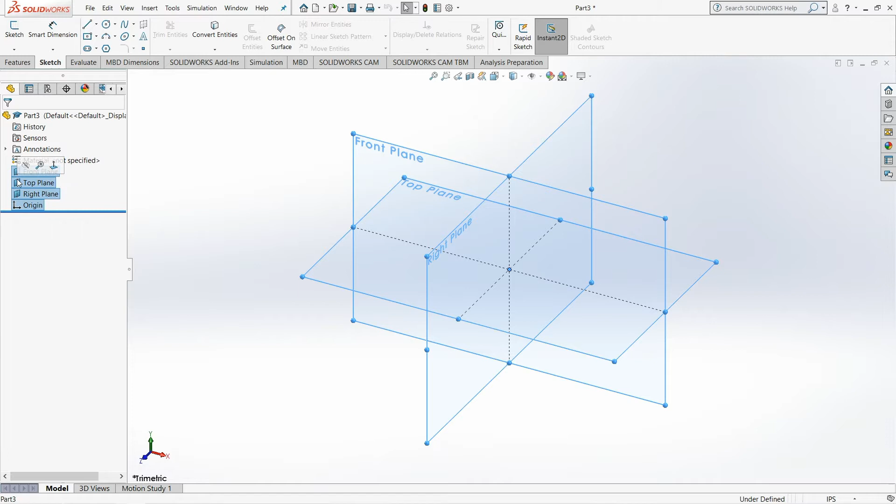Today I'll make a car wheel. First, I'll select the top plane. At first, I will make its middle part where the screws will be connected with the car.

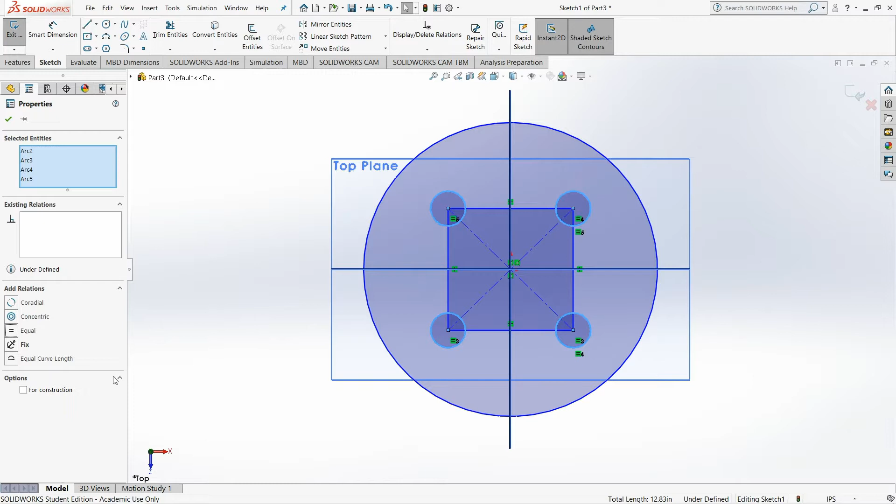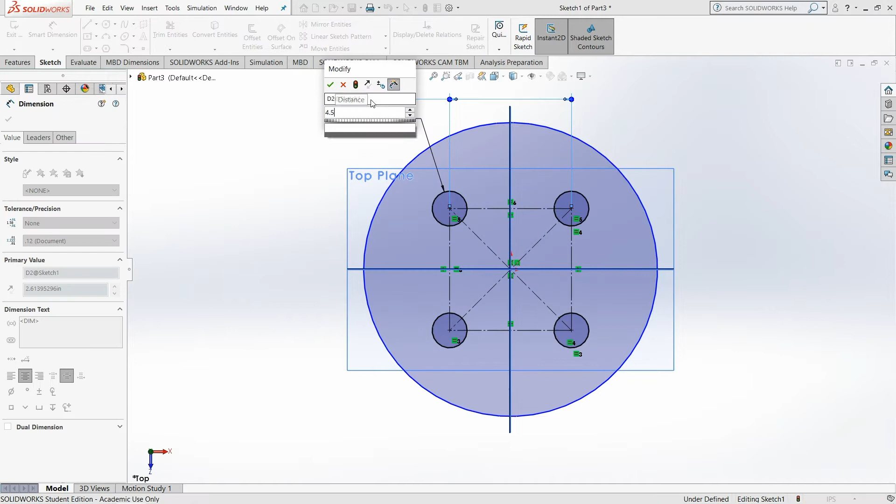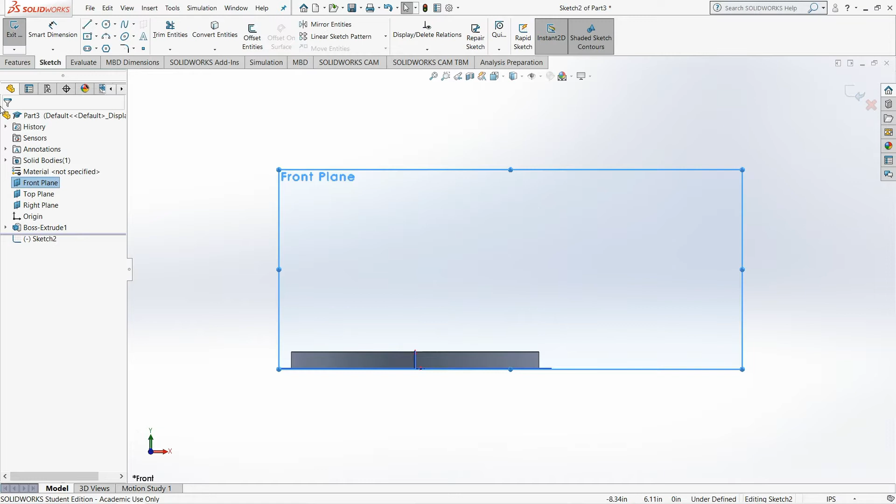I am taking dimensions arbitrarily, and it is not similar to a real car wheel. My goal is to show you how to make a wheel, not a proper wheel or like real BMW wheels, no. I just want to show you guys how to make a wheel in a very simple way. So you can make it, and when you have your own dimension values, you can make it this way or another way. It's up to you. This is my way of doing things very simply.

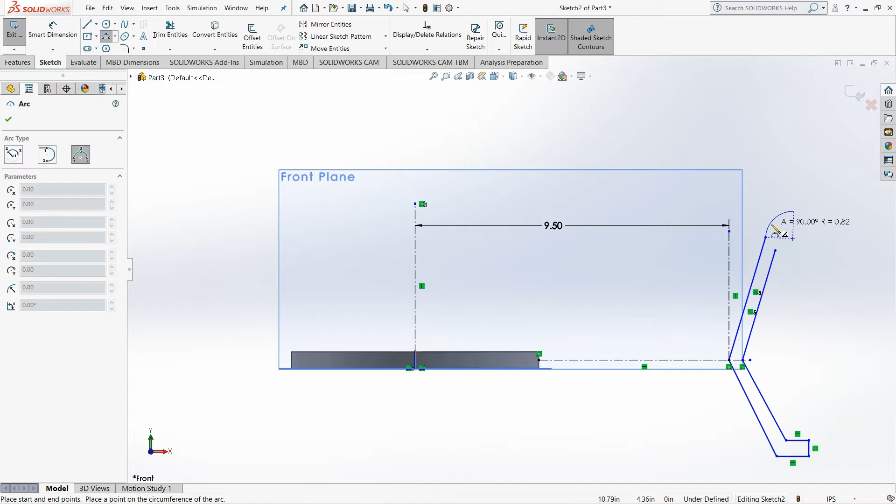Now I am making the skeleton. I will try to use revolve base, so I make a center line and make one part, and then I will make the revolve base.

Again, I'm telling you I will take my own values, it's up to me. These values will not be similar to a real car, and this design is also not a real car design. I'm just making what I want, this is my design.

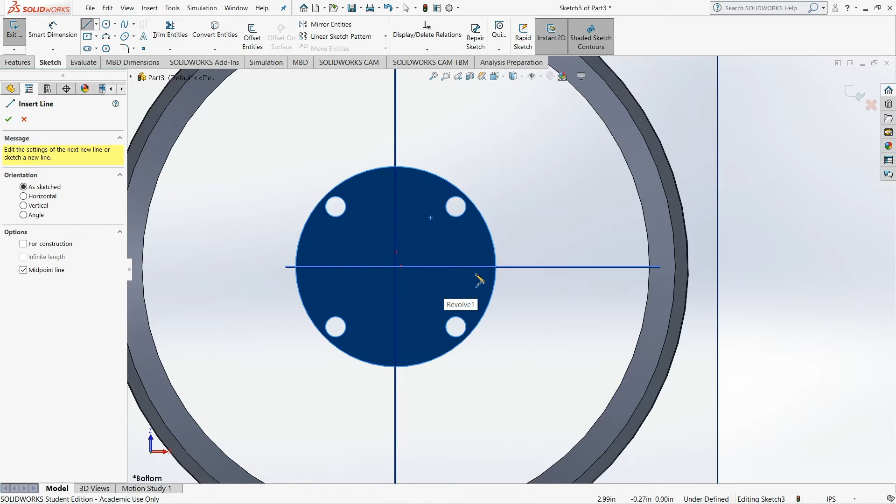Now see what I am doing. I will use loft. So at first I need to have two areas. I am making them now, see how I do it.

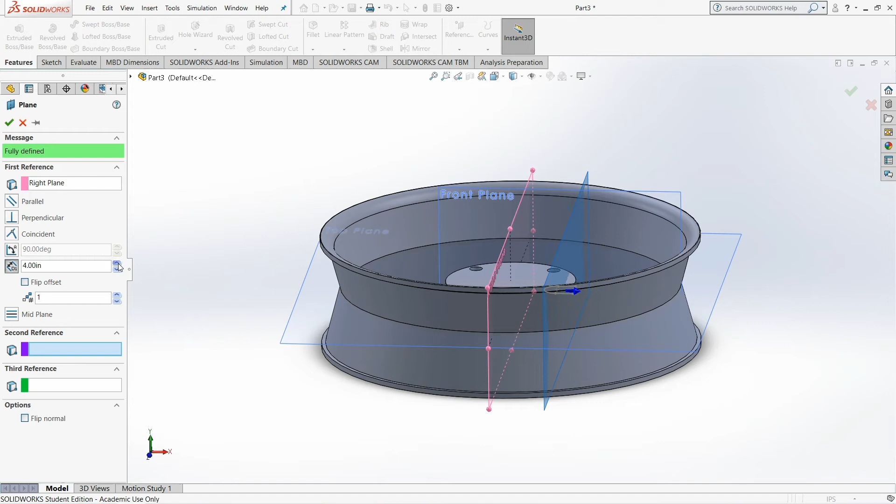I need this plane in the cross section of the body for my loft, then I don't need to extrude cut. You also can make this plane outside and loft it, then extrude cut it. It depends how you want to do it.

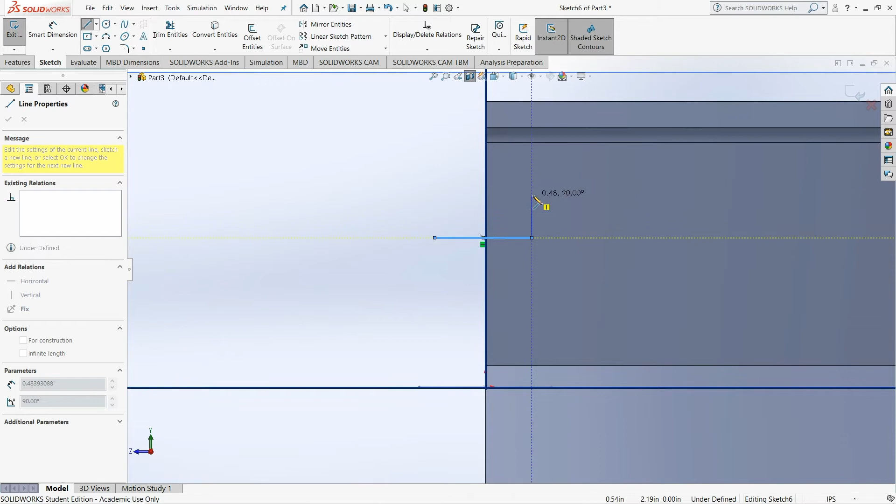So I will make the cross section to see if it's in the middle or not. And again I will say this, these are my values, don't compare them with real cars. If you want, you can make your own with a real model.

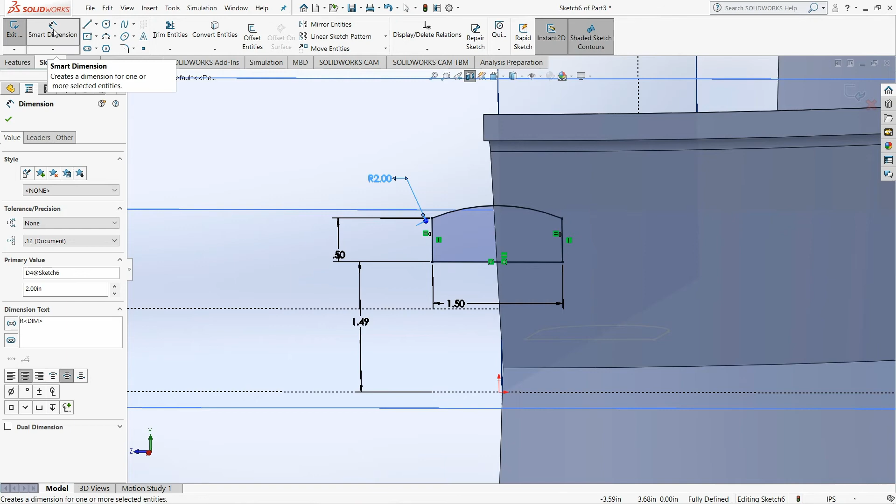So for the loft we need a guided path. Let's see now how to make the guided path.

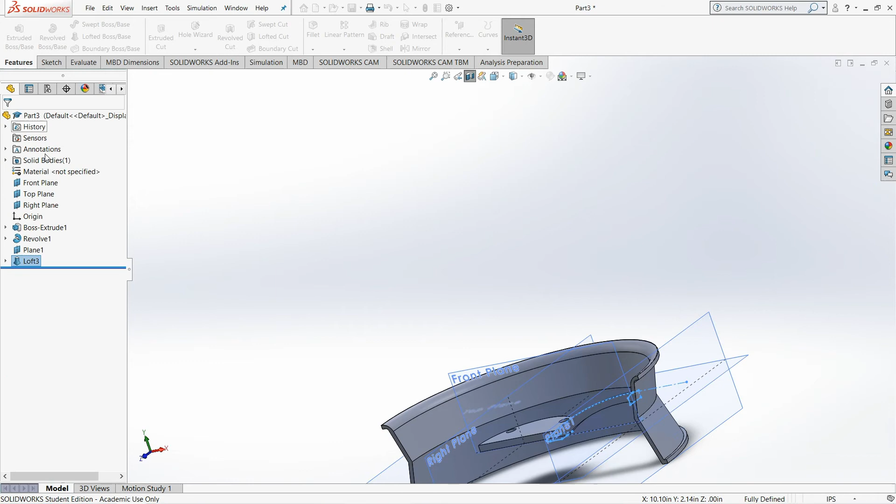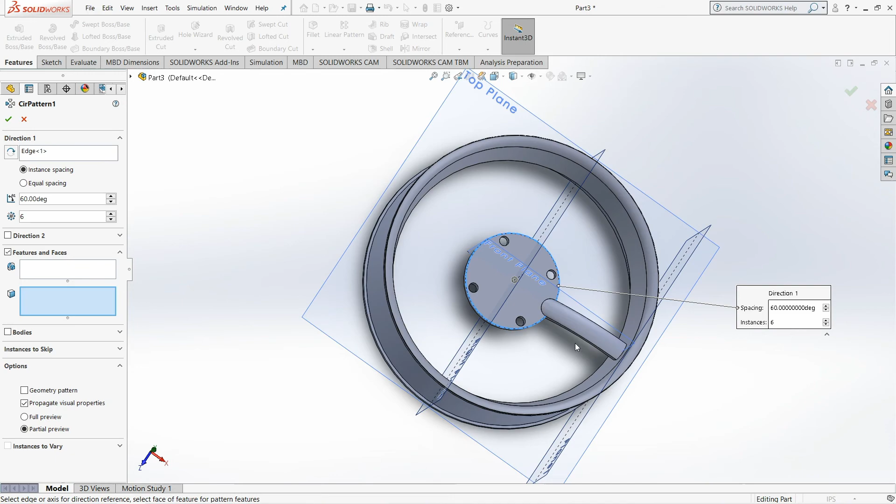See, my lofted part is done. Now I will do the circular pattern. I want to make 60 degrees and 5 or 6 copies. Let's see, is it possible or will it intersect? If it intersects, I will do an extrude cut from the hole, because it is joined in the middle part base, so don't worry at all.

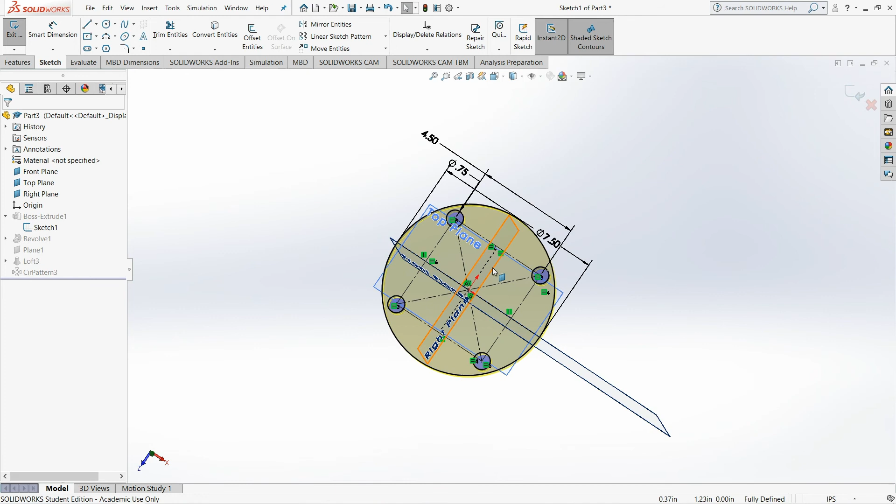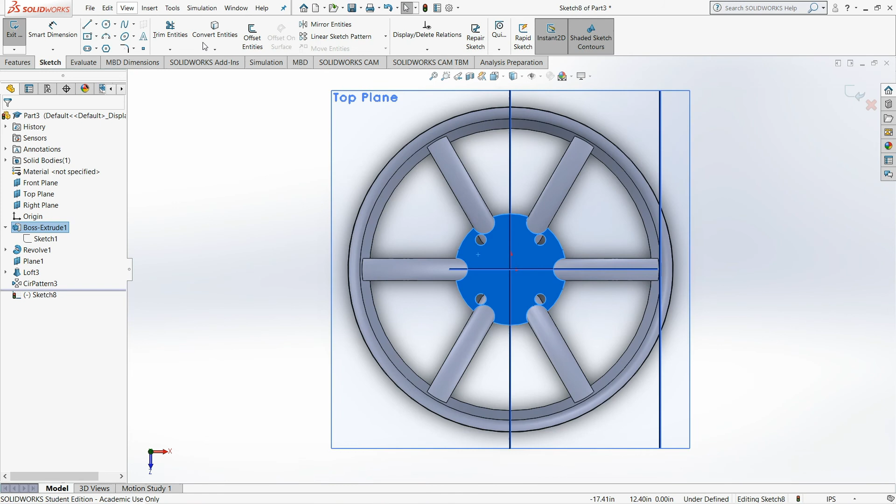For looking things beautiful, I change some values here. I will do a little bit of extrude cut now for making it more beautiful. Yes, now I need the middle hole.

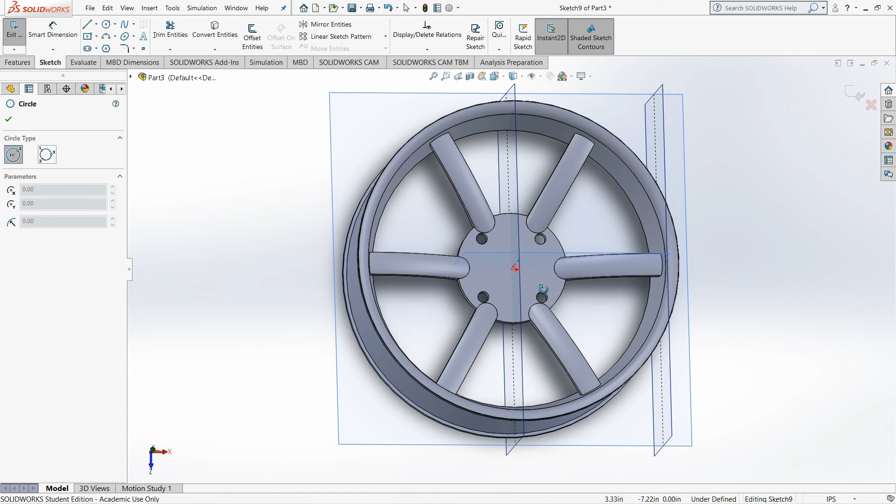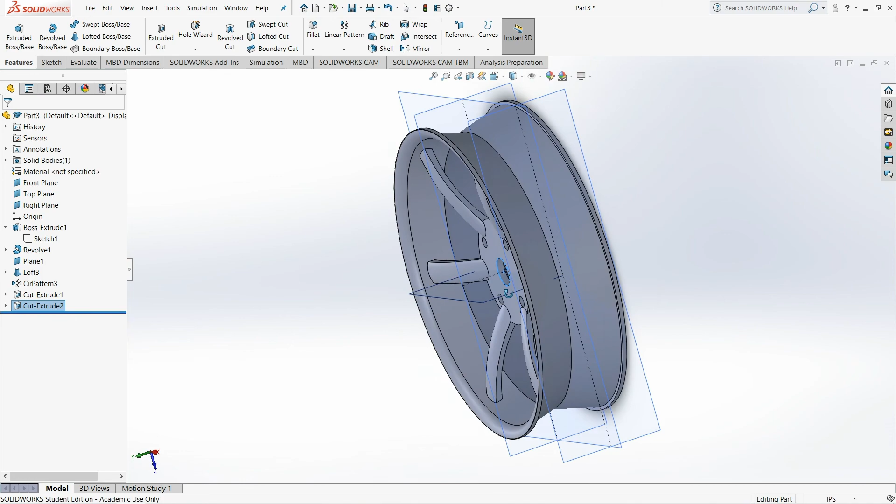So we are done. This is my car wheel. If I make a car in the future, I will assemble it with this car wheel.